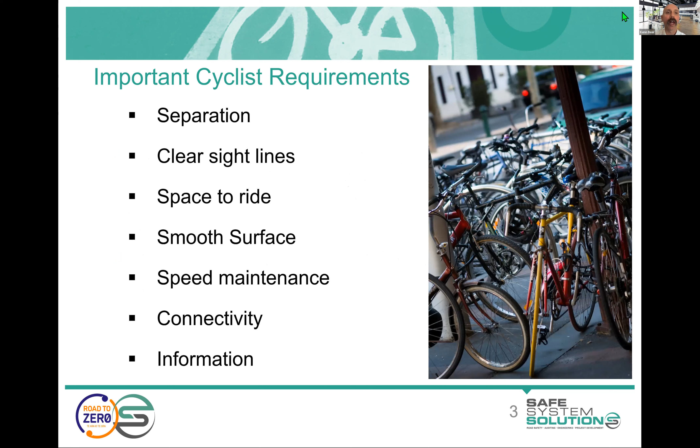It's sort of got these things to think about for safe cyclist travel. So we've got separation, clear sight lines, space to ride, a smooth surface, speed maintenance, which I'll talk a little bit more about, connectivity and information to warn, inform, guide, and the like. So just general high-level stuff there, but let's get into a little bit more detail here.

And as a road safety auditor, you kind of want to think like each of the different road users. Now that can be quite easy to do if you are a regular cyclist, or if you're a motorcyclist or a truck driver, and the like. But sometimes you've got to understand a little bit more about that road user. Most people have ridden a bike in their time, and so have some ideas there, but there's certainly a lot of variety in the riders we have, and I'll talk about that a bit shortly.

But you're asking yourself these things like, okay, I'm going to try and travel straight through this intersection. Would I feel safe doing that? Am I feeling safe on this road? Can I see things? What if they're turning? Will they be able to see me? The door's going to open in front of me. Just lots of questions like that.

I mean, what are we talking about when we say cyclists or people that ride bikes? It's the road user that I find has the biggest sort of spectrum to it, in terms of we have very young people riding, we have old people riding. We have young people and old people walking as pedestrians, certainly, but we have these extra differences for people that ride bikes, where we have the lycra-clad riders. Some people refer to them as MAMILs, the middle-aged men in lycra. They're out there doing their training rides.

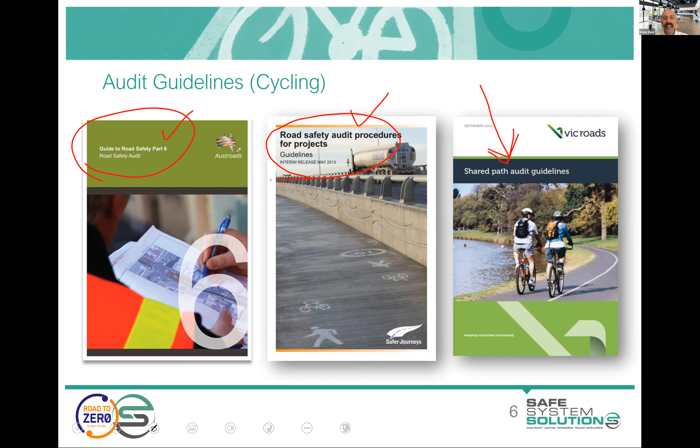There's this document which not many people know about. It is available. It's the shared path audit guidelines. It was a Victorian government document. I do like it. I think it's a little dated now, but it's generally good practice. So if you are undertaking a road safety audit on a shared path, it's a good document to have a look at. You do get good information in these documents as well, but that's a nice little document. I'll talk to you a little bit about shared path road safety audits at the end of this session.

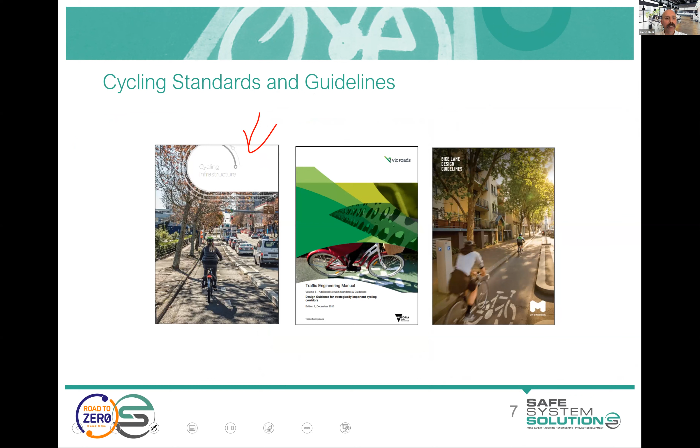Now then, you've got some New Zealand documents available on cycling infrastructure. There's lots of them out there. I've put a few here. I've put lots into your resource folder in this course, so you can delve into it. And I'm just sort of scraping the surface of stuff that's out there. The CROW manual, though, is generally considered the Bible of infrastructure design guidance. It's from the Netherlands. So if you want to get a copy of that, that's some pretty amazing stuff.

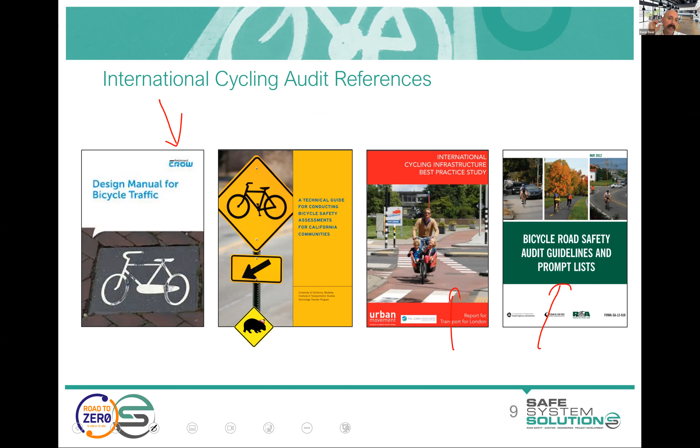And there's lots of different documents popping up here and there with different prompt list documents out of the States, and we've got more. We've got the UK document and others. So lots of stuff available to you. But let's jump into some immediate things that you might find as a road safety auditor.

The first one I want to pop up is the idea of longitudinal grates. Now, it's a very specific one, but for me, it's the one that typifies an issue which is almost exclusively for cyclists. Wheelchairs, yes, it can be an issue, although they're not usually travelling along that travel path that a cyclist would be going.

Now, I've done a number of expert witness legal cases where longitudinal grates have been in the road network or in the path of a cyclist, and they've dropped into them and come off and been seriously injured. And in those cases, I really just say, well, when we get to the component of the road safety audit course where we talk about what to look for when undertaking a road safety audit for cyclists, the first example we use is a longitudinal grate because it's so obvious when you've got an eye out for safety for cyclists.

I wouldn't say it's the biggest, it's definitely not the biggest cause of serious injury or fatality for people that ride bikes, but it is a very obvious issue. So we have many different grate types available, cyclist-friendly grates, and they're stock standard now. But you do see these sort of redundant ones in the road network.

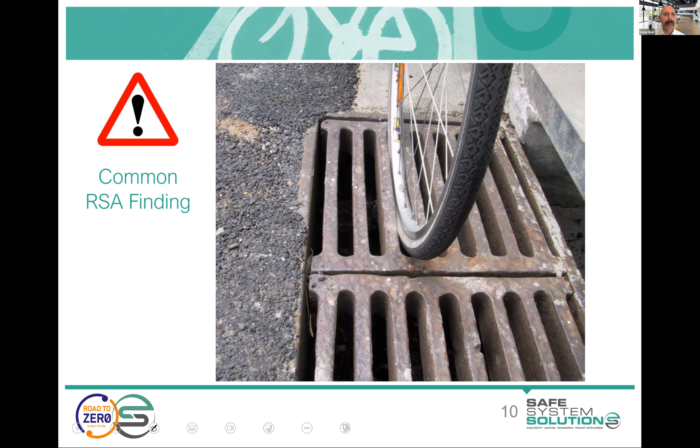And it's just unfortunate that with these incidents that happen, we want to get them done early. So cyclist-friendly grates, or ideally not having the grates and doing other drainage systems. But that's one. Another one that I suppose comes up a bit. I certainly wouldn't think, again, that this is a big source of death or serious injury for cyclists. But again, it's stuff that auditors can be picking up.

It's highly unlikely that somebody will miss that cyclist and plow straight into the back of them, where they've managed to see the green arrow but not the cyclist. I mean, that to me isn't really a possibility. More likely is we'd have some cyclists there, and then the vehicle would move to go around them, and that may be more of an issue. There could be something there. Hard to risk rate, but easy to rectify.

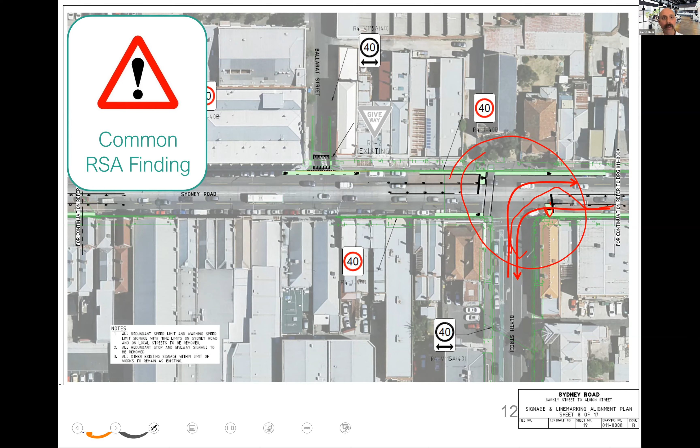Okay, this one is going to be for you to find a few issues and type them into the chat. So I'm going to pop up a picture, and I want you to act like a road safety auditor. Now, it's existing conditions, but that's okay. You're going to look for issues that you think could present hazards for a cyclist. I'll give you a second to do that.

I'll also give a prize to the person who can tell me what country this is as well. So, oh wow, I'm getting lots of stuff coming in. This is good. Okay, let's have a look. I've got to get my little notepad here to give out some prizes. Okay, so Margie gets the prize for saying it's Australia.

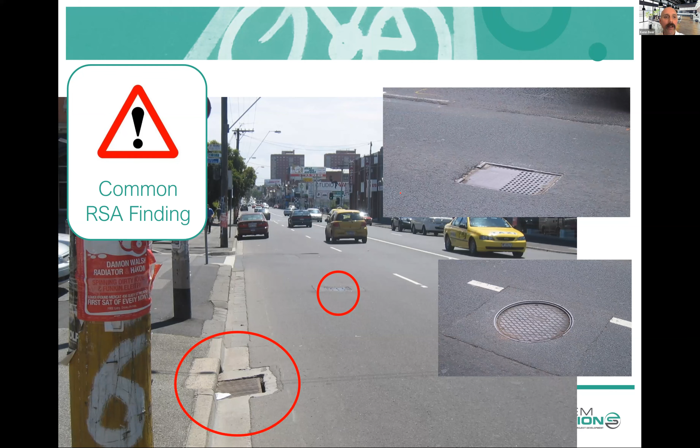Okay, I'm just going to keep moving on, but I hope that got you thinking a little bit. Of course, surface issues. Now, you may be looking at road upgrade projects and the like, where they're changing things, and you can look at the existing pits and different drainage structures and say, well, are we going to be fixing these, upgrading these, moving these? Or are we still going to have them and a cyclist going to be destabilized when they come across them? Or are they going to ride out of appropriate areas to avoid this sort of stuff? So thinking not only about that destabilizing, but also does it change travel paths for cyclists?

It's not an uncommon thing, and you may see it in design plans. On CAD these days, they just draw straight lines, but sometimes people used to look down a plan to see how things line up, and you see auditors doing that all the time to just get that feel for it. But what's going to happen there is we're going to see sideswipe crashes, and that's going to be quite common. They are very minor for passenger vehicles. But what happens when the cyclist is going along there and they're caught up in this? That's just the higher severity for that vulnerable road user.

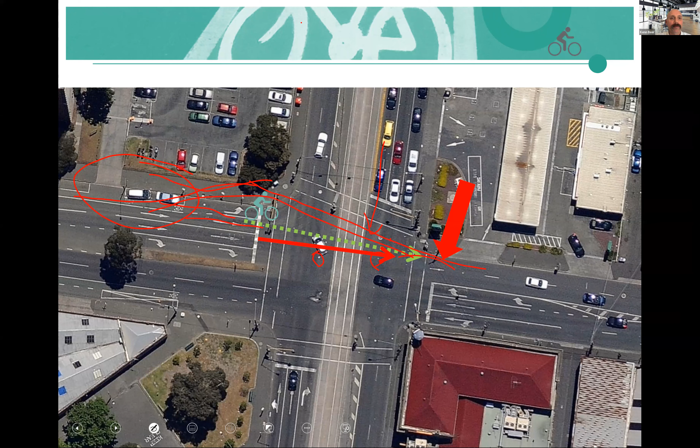Again, another little one is just as a cyclist comes up here and then gets squeezed out. So we have a stand-up lane, which essentially is, you get that extra lane at the intersection. We call it a stand-up lane. And then the vehicle coming out of here, where are they looking? They're looking back for their ability to merge. So we've just got this point where drivers are looking away from where the potential conflict point is, which is not a great scenario.

So you can do things like signal head starts, so the bikes get nice and out early, or the like, or thinking again about those facilities to protect cyclists through the intersection or exiting. It becomes very hard, but these are, again, things that can be pointed out.

So roundabouts have always been a challenge for people that ride bikes. Now, there's pretty good evidence in research around increased risk for people that ride bikes when roundabouts are there. There's actually not good evidence for the same around pedestrians. People commonly talk about roundabouts being dangerous for pedestrians, but I'm not aware of evidence to show that. I'm aware of some evidence to show that they actually appear to be safer for pedestrians. Now, I do admit that they have a serious permeability challenge, and they inhibit walking and the like. So we want to provide those facilities, but just from a pure safety perspective, we're not seeing roundabouts pop up significantly for pedestrians, but for cyclists, they do.

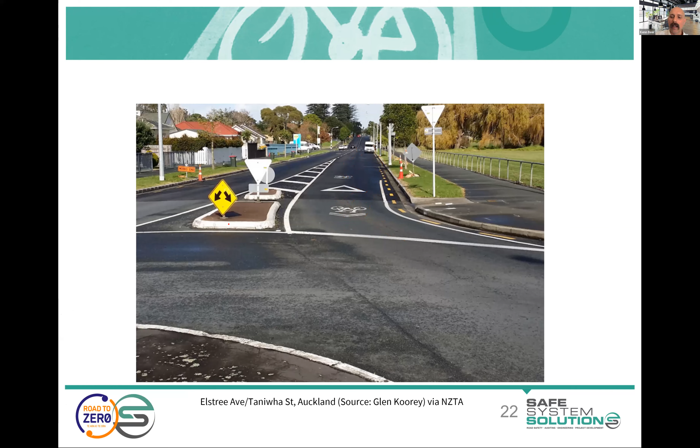2-lane roundabouts, just extremely hard to cater for cyclists. And if you talk to the Dutch, as soon as you're at a 2-lane roundabout, it's grade separated for cyclists. Your cyclists are going to go under, actually the roundabout usually goes over, because they don't like to make people that ride bikes have to go down and then up. They say, well, the ones that have motors, they can do that. The cyclists get a flat run through.

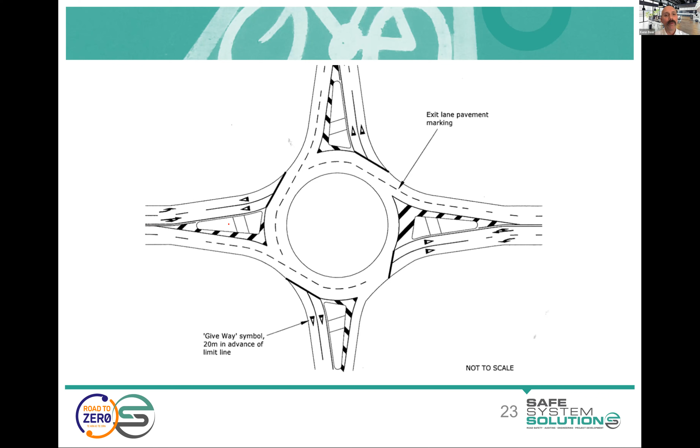But in Australia and New Zealand, we're often constrained for one reason or another. Usually it's the funding to be able to do this. And we have more and more people on bikes trying to use two-lane roundabouts, which becomes pretty challenging. There are different ways to look at it. You could look at things like pedestrian cyclist priority on legs where you have single lanes. Technically, you could look at that on multiple lanes.

And I'm just, again, doing some work trying to look at pedestrian cyclist priority on multi-lane legs, which are not signalised. And you really want to create a splitter island in between with open sight lines. And there is one example in New Zealand of that, and I can't exactly remember where it is, but if somebody can remind me, I've got, in the depths of an archive somewhere, a picture of it. There's a few others I've got from Australia, which are decent examples.

But at the least, creating good points for cyclists to pause, to wait for their gap to cross. And as I say, the Netherlands would just have you go under that. That would all be an underpass.

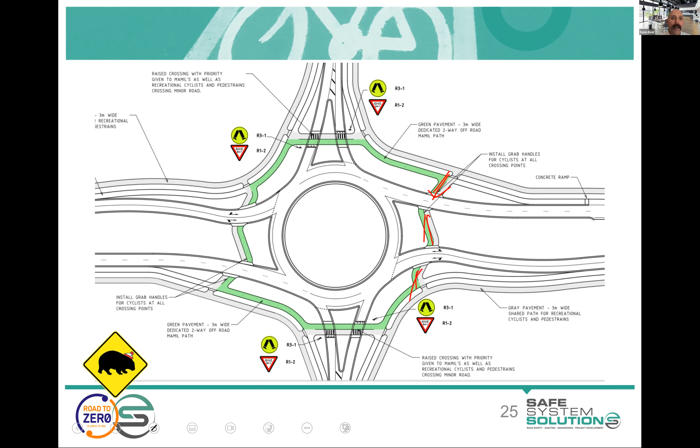But the best practice in terms of a single lane roundabout for pedestrians and cyclists are these what we call protected roundabouts, and I think we will see an explosion of these across Australia and New Zealand in the next decade because they have been built now, they have been evaluated, they're performing really well. There's understanding now about the function of our road network to be more than just moving cars, and that we are utilising these as active transport corridors, and we're okay to potentially slow vehicles in some specific areas down a bit and provide priority to those road users.

And they work really well. A cyclist wanting to turn right comes in here, goes around, and off they go. They've got their own way to do that, or they can continue through. So there's this one built, Moray Street. Happy to provide people with video footage of riding through it and walking around it, some 360-degree footage as well, if you're interested, if you're planning to construct one, or if you're auditing one, to have a look at features and what design tweaks work well and don't work well.

Really performing well. A courageous local government authority that popped this in as the first one in sort of Australia and New Zealand. And the reason is that it was known that it's going to slow vehicles down through there, okay? But they were pretty okay with that and had some great standard letters to send back to people suggesting that they walk or ride their bike where they possibly can, which I thought was very courageous and good, and it aligns with all of their strategic commitments.

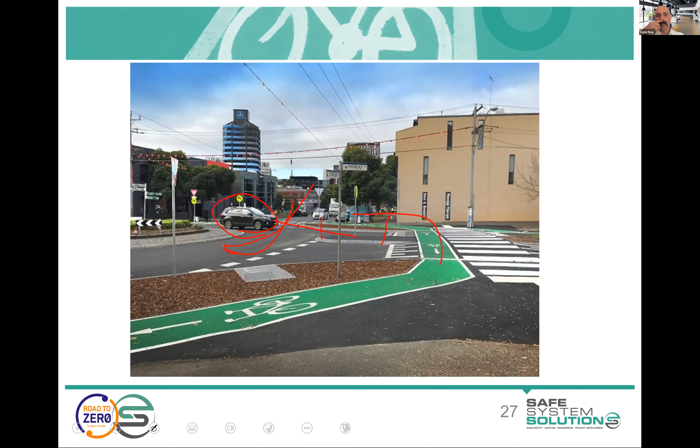But what you can do is sort of conflict analysis: video it, watch, understand, and it performs pretty well. Somewhere around 75% of cyclists utilising the facility, and the others are still just using the roundabout as they do, and yeah, working quite well. And people are still playing around with and trying to think about how to do this for two-lane roundabouts and what can be done.

I'll pop this one up for a couple of reasons, but as a road safety auditor, you've got to think, okay, are we providing facilities for cyclists? But are they going to impact on other road users? Are we going to create risk for others? Are we going to create risk for the cyclists by trying to cater for them? That's what we need to think about, providing that independent lens.

So this is an interesting one where the design idea was to create this little pocket there. One of our designers refers to it as the MAMIL pouch, because the cyclists using this route are predominantly middle-aged men in lycra, and the idea was that anybody who's turning right can ride up and then prop here and wait for their gap and then continue on through there.

But as an auditor, you just sort of look at that and you again put that common sense lens on it. And first of all, say, well, is the pack of riders going to use that? No, they're not. There's not enough storage for all of them. This is sort of the one rider will use it.

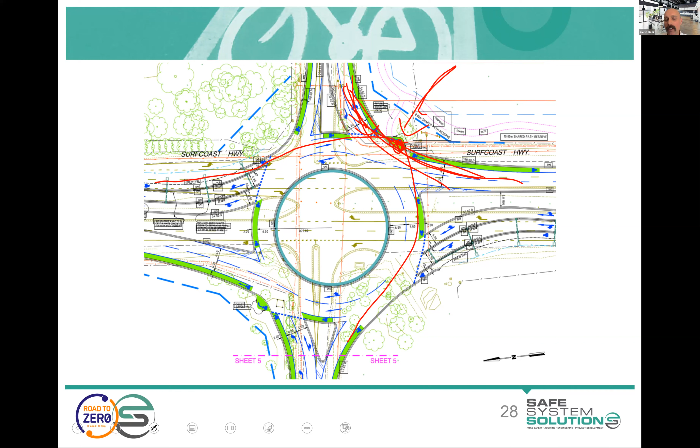And the second one, you start to think about vehicles coming out of here, larger vehicles, swept path of vehicles. Are we going to have vulnerable road users storing there and larger vehicles coming around here and their trailers and things sweeping over these areas, and some other challenges there. So, lots of thinking to be done as a road safety auditor and lots of input that you can have.

So cycling facility, well, it's sort of a shoulder cycling facility, and this is the design. So this is good because this is the kind of stuff you'd be looking at and you'd be saying, okay, so we've got that, and then it goes up and there's a dedicated sort of bike facility along here for riders, and that's nice. Get them out of the circulating carriageway, get them a bit of space, and they can go through. It's going to be a challenge to turn right, but we won't deal with that in this one.

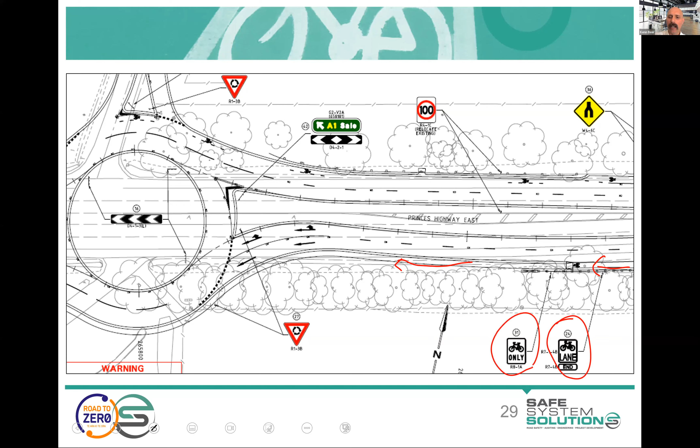And this is good. And what have we got here? Some interesting signage. Bike lane ends, and then bike only. Okay, this is interesting. You get there on the ground once they've built it and have a look at it. Think, okay, as a cyclist, as somebody riding up to this, what are you going to think? And to me, I look at it and I go, well, I kind of think that my facility ends here. And it's time to get in and battle it out with the cars and the trucks.

And a little bike only symbol up there. And I think we might miss that potentially, or it's really not that obvious. And it's interesting because this was purpose built for the bikes, yet to me, it almost will do the opposite. It's going to create bikes pushing into that area. So some simple little alterations to this, thinking about it at design stage, or even potentially at post-opening, as this one was, would be to use some green, just connecting those two.

That would very quickly highlight that is where cyclists should go. That's not the traditional use of green paint, okay? Green paint was and is generally used for a conflict point between a passenger vehicle and a bike, okay? So it is to warn the driver that a cyclist could come to this bit of the road.

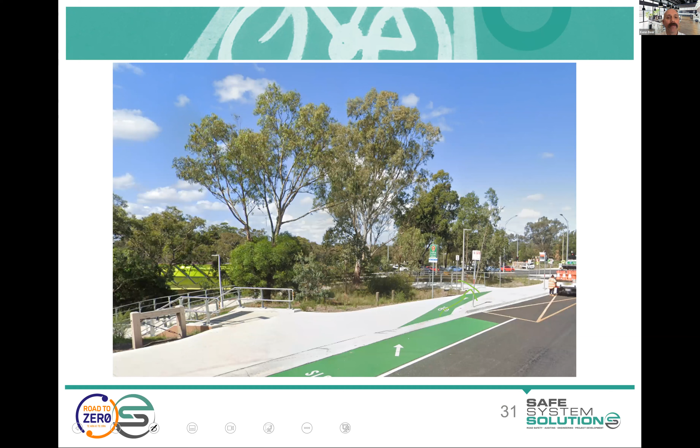Pop your questions or comments in. I'm sort of running through a whole lot of stuff. I certainly do love bike infrastructure, and I'm an avid rider of bikes myself, so get into this.

Dooring, a term that's really unfortunately risen its head in the last 10-15 years, is the act of a door opening in front of a cyclist, and the cyclist either striking the door or avoiding the door and going into fast traffic. Most of the death we see associated with dooring is secondary impacts, where the rider hits the door, comes off, and is then struck by vehicles in the lane next to them.

We do have a lot of serious injuries, not a good thing, very bad thing, of cyclists hitting the doors, so that actual impact, but the highest severity incidents involve the other vehicles. Really hard thing for us to treat a lot of the time. However, we are getting better. I'll jump past that one.

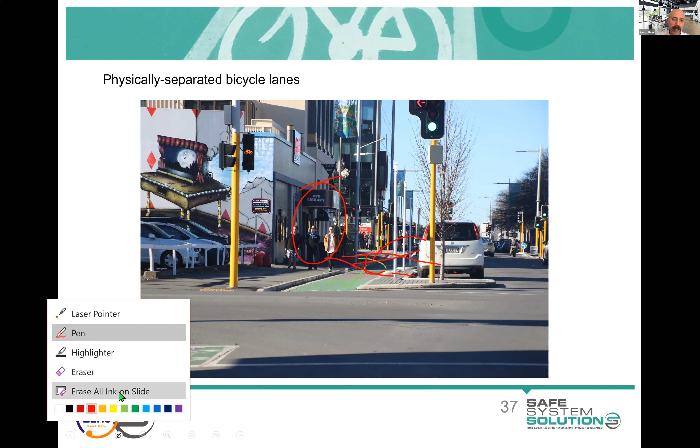So I'm just reading a comment here. Do we get peds crossing? Yeah, pedestrians certainly do cross in these areas to their cars and can use the crossings as well. Occasionally, and I've got some photos of this, we have them used as parking facilities and taxi ranks. If you provide particularly wide ones, you're going to have vehicles park or store in there. So that's a challenge to work through.

Again, these things from a road safety audit perspective, you might be putting them in as notes, which you can do in an audit. You say, well, I can't make a clear line to a crash which is going to cause injury, serious injury or death to anybody, but it's going to be a not great situation from a user perspective or the like. You can put them in as notes.

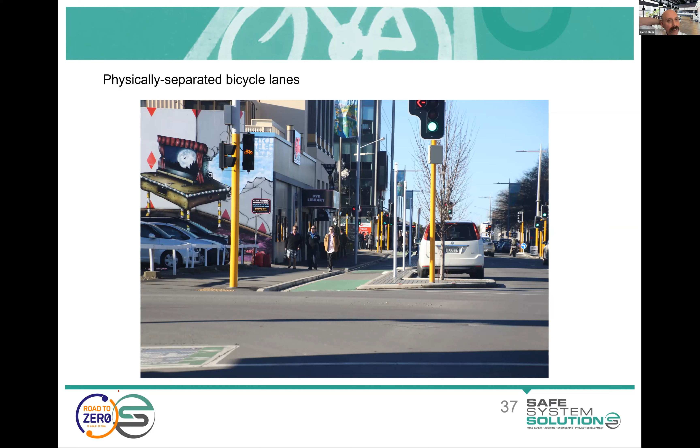And I talked a little bit there about shared path crossings and giving priority to that shared path. What you're essentially doing is creating an intersection where that path acts like a road and it is the priority road. So you will put these give ways to the vehicles. Now, you really want to be raising these because there are just wonderful benefits all around for that, slowing the vehicles and the like.

We've got some different signage these days, so check with your local signage exactly how you would sign these, but these are something that is being looked at, and you can see the sort of way that they come about. Now, sight lines, important one. Think about providing drivers enough sight distance to be able to stop because they don't have priority. So essentially safe intersection sight distance at these locations. And that's what the rider will see, and they get that clear priority.

Now, as a road safety auditor, this is a classic example. I do have a video of this, but I don't trust my ability to stream that through. As you're riding this wonderful shared path, you go through this priority, you go through the next one that has priority, and then the third one you hit doesn't have priority, but it kind of draws you along. It's an old rail trail, and it's still got the rail lines embedded in the pavement, so it even gives that effect.

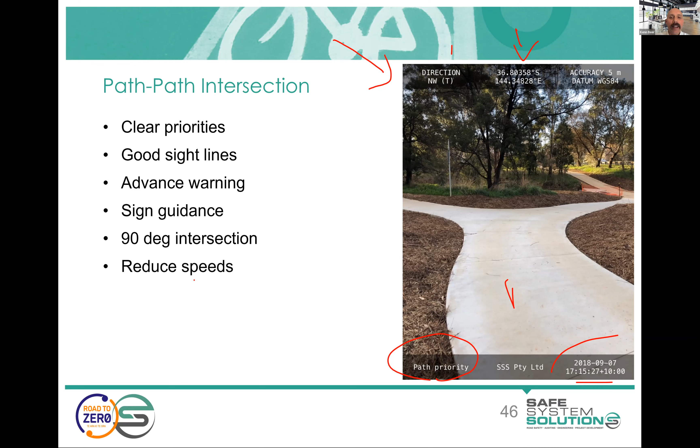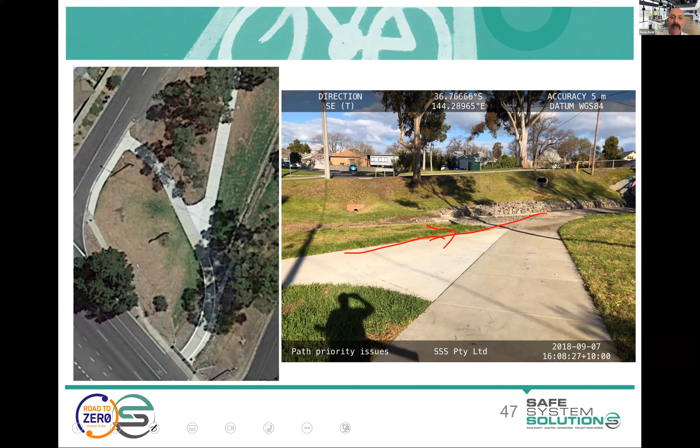Okay, let's jump through a few more. Yeah, more path priority sort of challenges, it's like a Y intersection on the road network, isn't it? Who's got priority here? Not very clear. You could have incidents. So actually that one technically has priority, but with the path it changes. It's a little bit interesting.

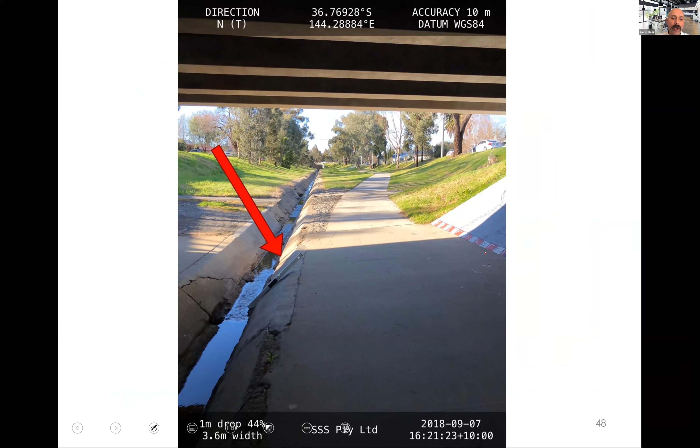Drop-offs, of course, an issue, and there's some good guidance in the different documents about acceptable drop-offs. But again, go common sense at it. Would you be worried about that? If somebody was walking down here with their dog and the dog jumps out at the bike rider, or a kid or a pram, shared paths can be quite chaotic places. So it might be obvious, but you may need to avoid these sorts of drop-offs, or even hazards close-ish to the path we don't like.

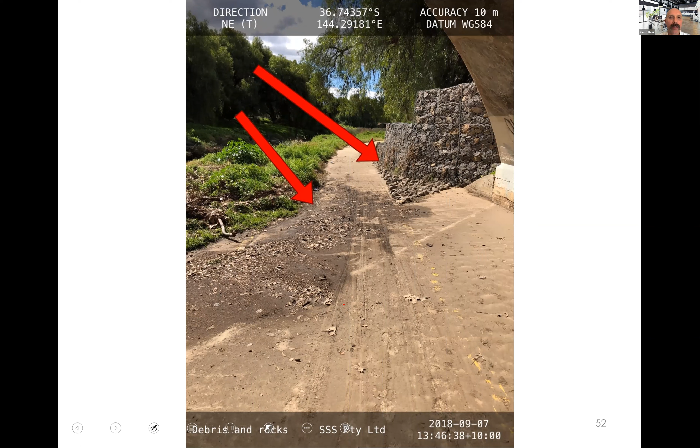Different obstructions within the path, and at night these things can really disappear, so you want to significantly highlight those. Debris on the path and the like, I think those are fairly obvious.

Fencing, thinking about riders catching the pedal or a handlebar, and so we want to use specifically designed fencing. And there are really great fencing guidelines and specific fences to get approved. So again, look at your local fencing guidelines. You'll see pretty obviously when you're riding along fences that you go, well, I don't want to go anywhere near that. You don't want to go near these, but it's better.

And often we have shared paths close to roads, and there's good road safety thinking in terms of separating using barrier systems. Unfortunately, the back of a lot of our W-beam systems present significant snagging hazards for path users, so think about how to manage that. Again, we've seen some road controlling authorities in Australia be successfully sued for riders and joggers hitting the back of W-beam systems and seriously injuring themselves. So something to think about.

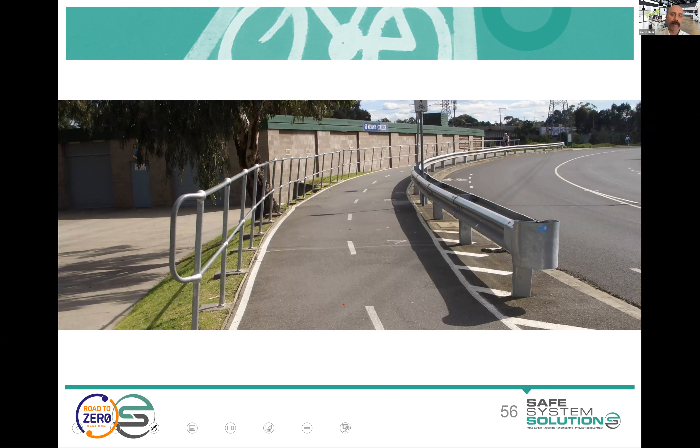Options include back-to-back systems. There's now wonderful back-to-back W-beam, flexible W-beam systems available, or your old standard G4 or Type B systems like this one can be done. So it's available, or creating more space. There's some post caps available, plastic post caps and things.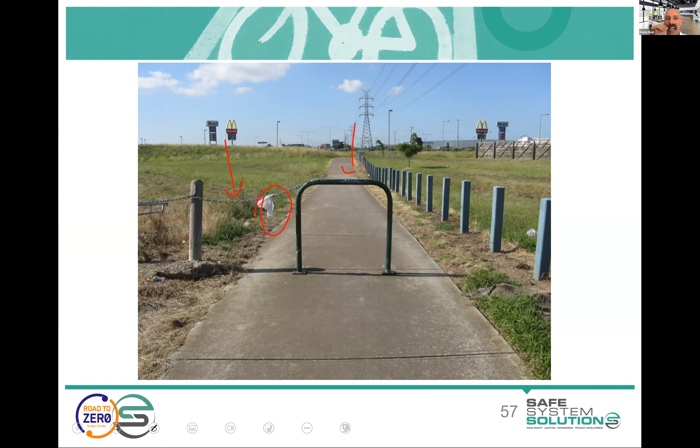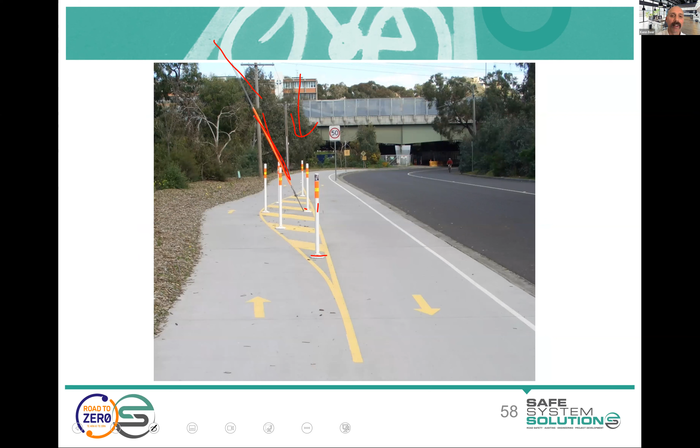I think this is a good setup. I think they've done well here. The cable stay, which is holding a power pole, ideally we don't have that in the middle of the path. However, they've clearly delineated it. They've got retro-reflective. They've got flexible posts, the ones that will collapse. They've line marked that, and put highlighting and a little bit of protection on the actual hazard. All things considered, I think they've done a decent job here with the situation they had.

So I sort of ran through that at the end. We did a little fact sheet on these thematic audits, and these actually now have made it into the 2022 version of the Austroads guide. But we've had these for a while.

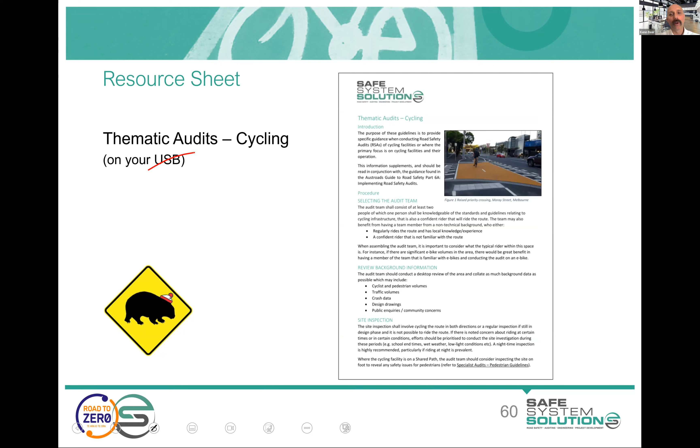I put the originals into your learning management system, not on your USB. They're in the learning management system, so you can have a look at this. It just gives a little bit of the guidance that I'm talking about. So if you are doing one, you can have a flick through the shared path audit guidelines, and you're good to go. We won't do that quiz because I'm going to catch up on a bit of time.

We're going to talk about... oh, that's not where I want to be. That's where I want to be.

We're going to talk about motorcyclists now. And I will move quickly through this. I apologize, but I'm going to give you some info. There's a bit of overlap between motorcyclists and cyclists in some of the thinking, but certainly riders have unique needs and are often a forgotten road user in our thinking.

Now, you've got some wonderful New Zealand people for motorcycle safety. You've got many people who know that. Robin's in this course, Robin Gardner, wonderful motorcycle safety thinker, and many others. So you're in a good position for assistance, but as a road safety auditor, you need to think about this road user as well. And so I'm going to go through requirements of motorcyclists for safe travel, different technical information available, common issues, and some treatment terminology.

Motorcyclists are seriously overrepresented per kilometre travelled compared to cars. We're talking 20 to 30 times more likely to be killed or seriously injured. And there's a heap of factors as to why that is. But their vulnerability and their size are certainly big ones.

So immediately we have some documentation available that will help you to think about the needs of motorcyclists associated with the infrastructure, the design, the operation of the road. And Making Roads Motorcycle Friendly here, you have your New Zealand version, and that's available. You can Google it, Making Roads Motorcycle Friendly New Zealand. You can have a look at the other jurisdictions that have them as well. And it's a good way to gauge what are the particular things for motorcyclists that we need.

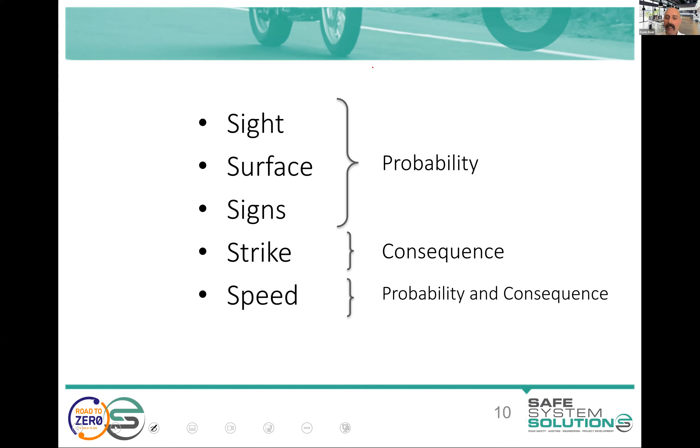And this kind of curve that tightens up has a technical name. Actually, I'll give a prize if anybody can tell me what the technical name for that is. Ooh, tricky one. Some people call it a double radius curve, but it has a particular name which Jesse has got, compounding curve. So it's a compound curve, and not a great thing for cars. You're going along and then it tightens up, and maybe there's a little bit of traction loss, but generally cars are okay. Riders don't have that correction luxury, and they end up on the wrong side of the road, or if it's the other way around, they end up in the roadside.

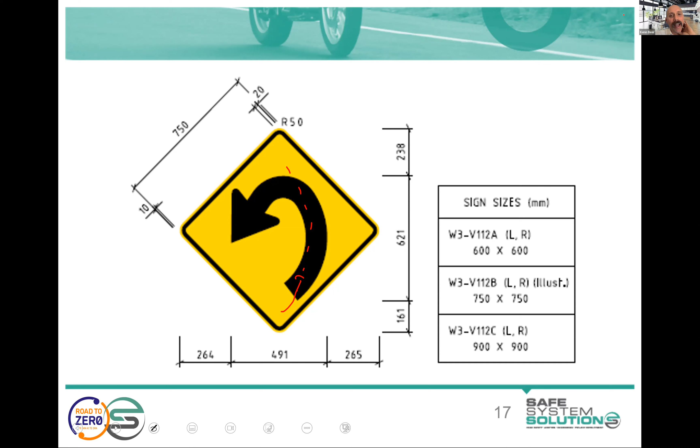So particularly dangerous. So these signs are available, and there's been some evaluation of them, not the best evaluation, but they are proving really quite good, at least from riders' commentary around them, in warning of these compound curves. Ideally, we wouldn't have these compound curves, but they're out there, and it costs you $1 million to remove one, so you're going to end up having to sign them anyway.

Is it in the TCD manual in New Zealand? I'll wait and see if anybody else can answer that in the chat. I don't know. I know there was interest in using them and trialing them, and I think they do a wonderful job.

Here's an interesting compound curve example. Four motorcycle run-off-road crashes to the outside of the curve at this location, and it's got a 252 radius into a 117 radius, an unsealed road entering here, the gravel wash there. You can see why it's a particularly dangerous location for riders.

So as an auditor, and I'll talk to you about motorcycle audits, you essentially would send a rider through the route ahead of a trailing vehicle of auditors, and the rider would be mic'd up and talking about what they're feeling and seeing, and they will tell you. You don't need to do ball bank indicator tests or GPS tracks through a touring route, because that rider will go, wow, that tightened up on me, and you know that's a compound curve, and you'll probably feel it yourself in the vehicle.

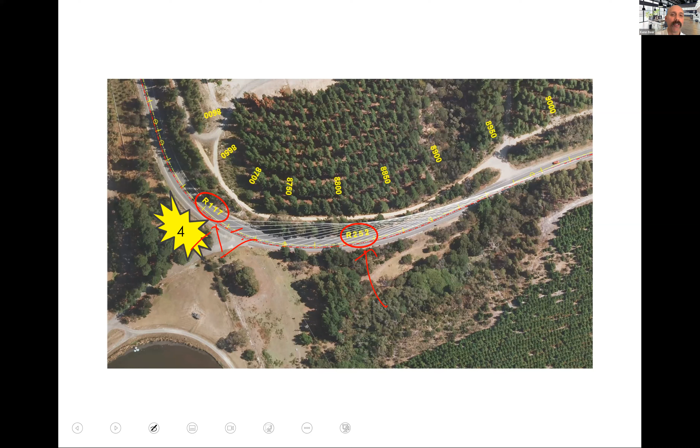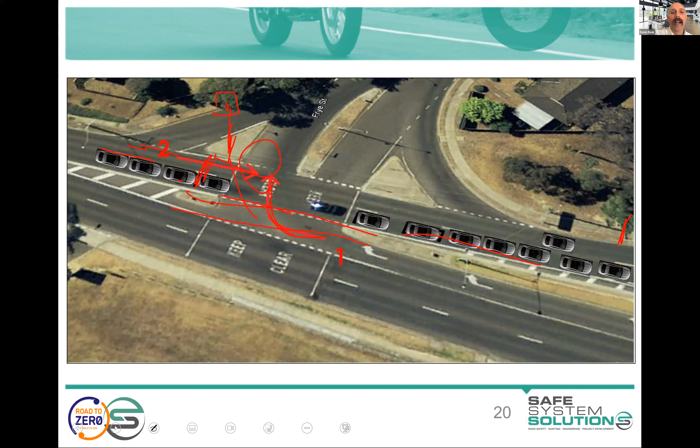What can we do about it? Well, as an auditor, you could recommend all sorts of things, from linking signals. This is obviously queuing back from a set of signals. You could put signals here, so when the queues get to a certain point, you block the motorcyclists this way. You could pull the keep clear hold line back a little bit to open up sight lines. You could block that off if there's no need for it, and different things to do.

And let's talk about the surfaces. So motorcyclists lean, and this creates a scenario where the rider is heavily reliant on the surface. Their center of gravity is out there, and any surface defect will slip them out, and we're in trouble. So motorcyclists, we talk about as the canary in the coal mine when it comes to surface deficiencies, the first to be killed.

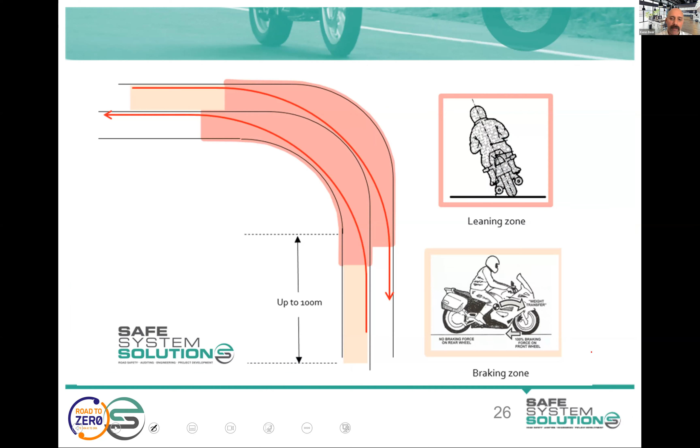It's more of an existing conditions look you tend to do, but if you're looking at areas and wondering whether these surface deficiencies are going to be fixed when they grade the road, you look at the design, you can think about motorcyclists and cyclists as well there, especially where they're leaning, where they're braking into different curves. So we want good skid resistance and consistent surfaces.

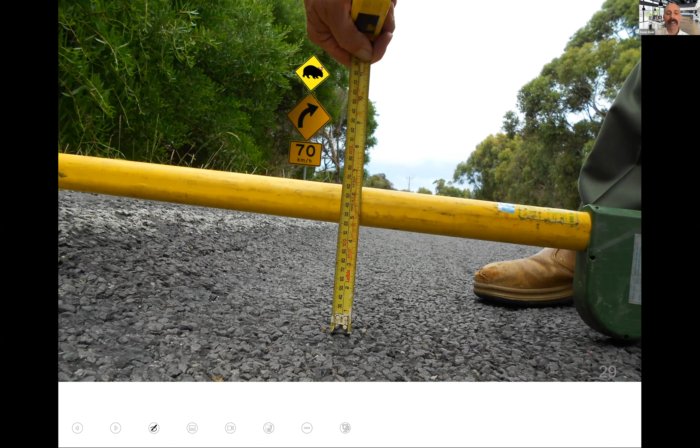But unfortunately, we see a whole lot of challenges out there. We see different depressions in the road, which can destabilize a rider, make them lose traction or lose their line. Potholes, pavement failures, roads in all sorts of disarray. And in terms of roadworks, gravel wash, mud, debris, detritus, all that stuff on the road surface makes it slippery, and we've got to think about

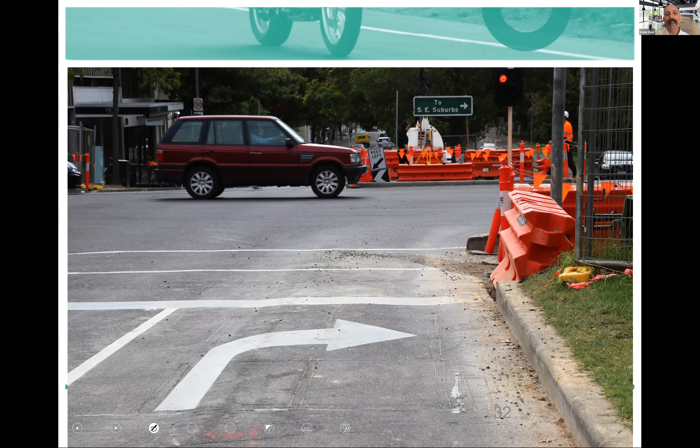riders in those situations. We think about our patching and where we're doing patching, and whether we can do full width patching across the lanes. That would be good. It would cost a little bit more, but you can see that the rider's line is directly on the connection of that patch, which may open up and break up over time.

So a question there from Sebastian, which is a good one, around the inherent vulnerability of motorcyclists and whether to phase them out of the transport system. Well, gee, I could have a long chat about this. I'll make two comments. Well, first of all, if motorcyclists didn't exist and they turned up and wanted to use the road network, there is no possible way they would be allowed. Like, the risk is just way too high. But we're not in that situation. We're in a situation that they are

a road user, and they are a licensed and registered road user, and thus, as road safety auditors and as road designers, we have a duty of care to do the best we can. Now, we're going to struggle to do everything to make it completely safe. However, that's the world we live in. Now, there's bigger political things. Do you try to phase out motorcyclists? Well, it's political suicide to jump on that bandwagon at the moment.

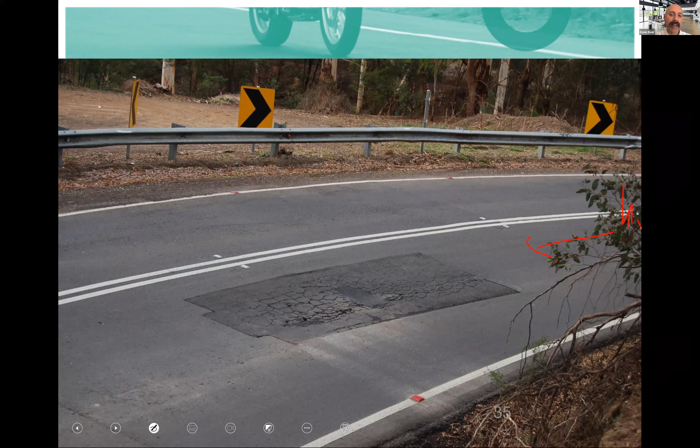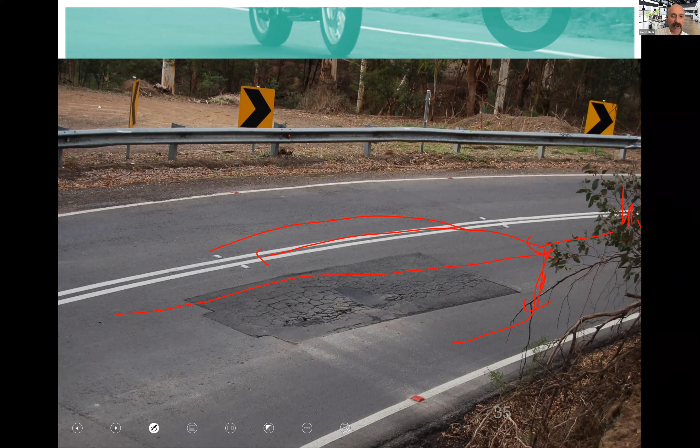I'll let that happen. Still talking about surface issues, and just interestingly, on those curves where a rider is fairly stuck to a line, if they encounter something like this, coming around a curve and there's a sight distance impediment, there really is no option to go inside this. The only option they have is to go outside it, pull the bike upright and try and navigate it through. They're really going to go on to the wrong side of the road. So that advanced warning of any of these issues is so important. Obviously, trying to fix it, not have them there, is the ultimate.

Now, as a road safety auditor, you're often auditing to the design, aren't you? Well, you can look at where surface pit lids are going to be put, and if they are in the circulating carriageway of a roundabout, or in the middle of travel lanes and things like that, you can point those out at that early design stage and see if they could be moved, which is a good time to do it.

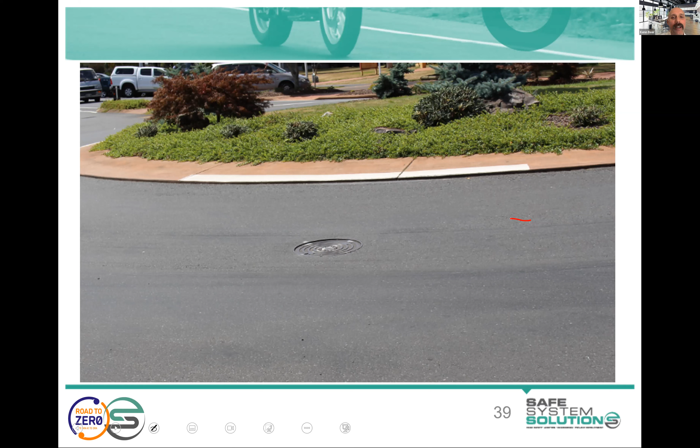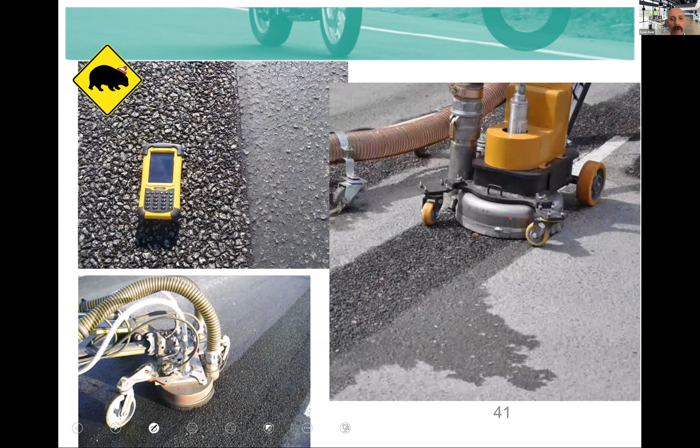Surface conditions: we can improve skid resistance in many different ways, water blasting, different surface treatments and the like. So have a think about that. Think about the curbing that's used. There are obviously drainage requirements around different curbing, but barrier curbs are easily enough to destabilize a motorcyclist. The more mountable the curbing, the better.

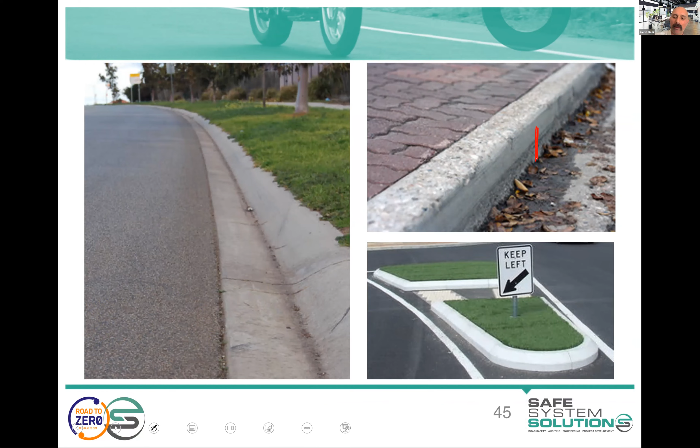Guaranteed, if you get into road safety auditing and do a fair bit of it, you're going to see designs or proposals to paint lots of stuff on the road surface. I want you to think about that potentially being a slip hazard. If it's a thermoplastic line marking and it gets a bit worn and a bit wet, it's very slippery. We don't want to see big swathes of paint on the road surface, because it can be that slip hazard for the rider.

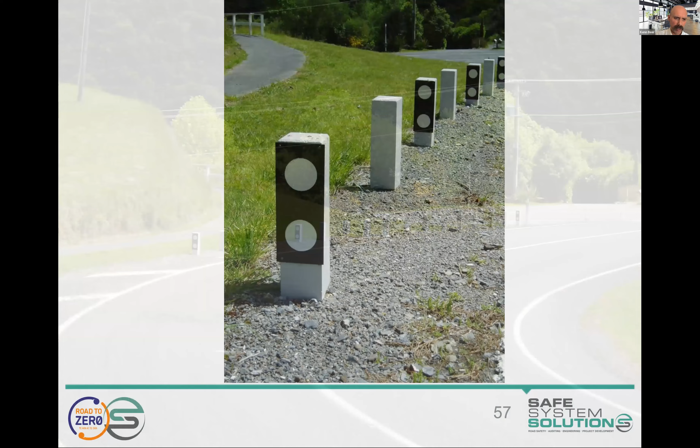It's a popular area. We've got a bit of a surface issue. We've got a curve. We've got these concrete block things. They're not going to be good for cars, but they're quite a hazard for motorcyclists there. So we have to think about how we treat those.

We do have flexible signage available, because a galvanized steel post that we would usually call frangible, breakaway on impact, is certainly strong enough to kill a motorcyclist. They hardly budge. They just kill the rider when a rider strikes them. We do unfortunately see quite a bit of trauma associated with riders striking normal signposts and being killed and seriously injured. So there's work happening in that space. It's very hard because you've got to cater for wind loads and all sorts of things. There are low mount products which are quite good, but for higher signs it can be challenging.

One way to do that is using underrun protection, because half of the motorcyclists hitting barrier systems are sliding on the ground and hit the base of the barrier system. The other half hit the barrier system while still on their bike and go over the top.

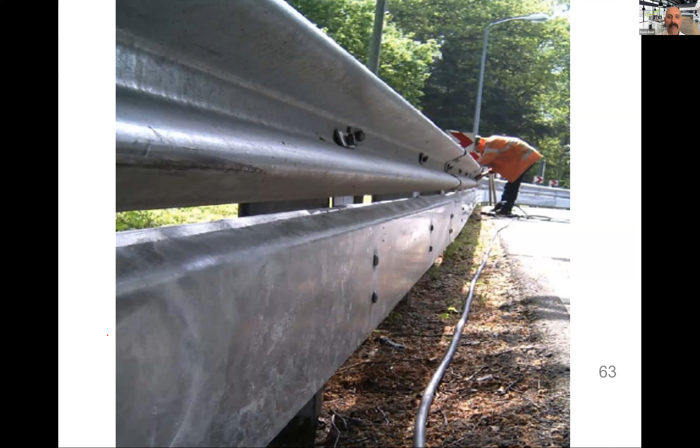So this underrun protection, and there's a heap of different products that now do it. So the generic term is underrun protection. People might call it rub rail. I mean, rub rail is a particular product, albeit a public domain product. So there's different ones. There's biker shield and motorcycle protection rail and different brand names that you can use, but they sort of create that continuity of the barrier system.

So if a rider's sliding along here at 60 kilometers an hour on the ground, hitting one of those posts, definitely seriously injured, if not killed. And if we put that there, lower injury, likely not killed, likely to hit it and slide along it. Still injured, I would imagine, but a better scenario.

And these have been crash tested under the European crash test. The Spanish invented it, but I think I've got a video of that crash test coming up. But it can be retrofitted to existing guard fence, and oh yeah, here. So this is the European crash test. You use a motorcycle crash test dummy, which is just a normal crash test dummy. You do minor modifications to it, and then you slide it on a sled and let it run at 60 kilometers an hour directly at the post, and then you do one directly in between the posts.

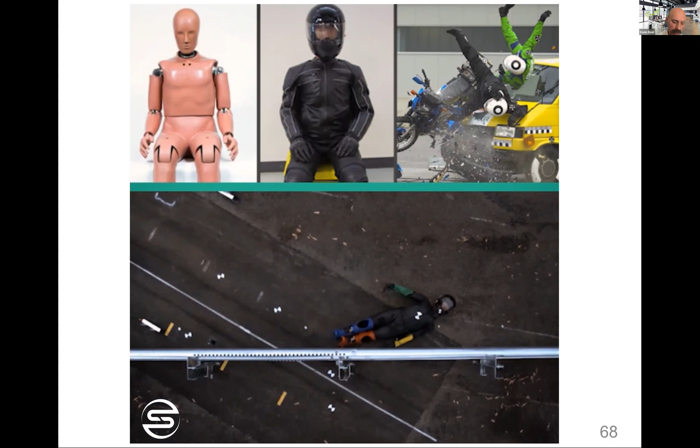And so this one has proven that these bring the crash severity at that 60 kilometer per hour, 30-degree angle within tolerable limits, under sort of level 3 serious injury. So it's as friendly as you're going to get at a 60 kilometer per hour crash into a solid object as a motorcyclist. So we can get good benefit from that.

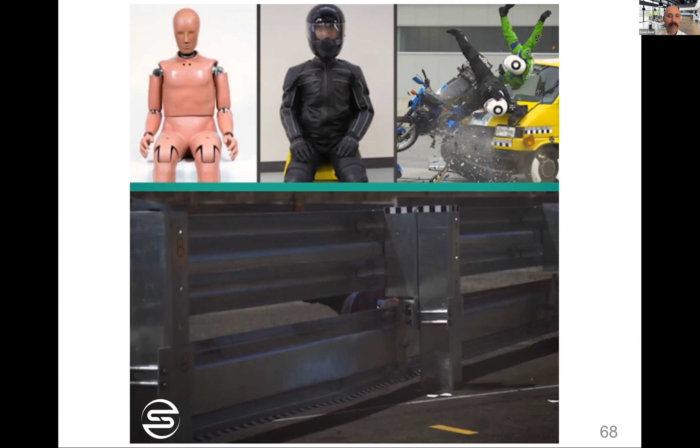Little tip as auditors: the end of a barrier system is a pretty specific engineered device. We don't know what would happen and how that would operate if underrun protection was connected to it. Nobody's tested that, and so if you were to see connections to that under here, that may compromise the functioning of that end terminal, which, if struck, does some very specific things.

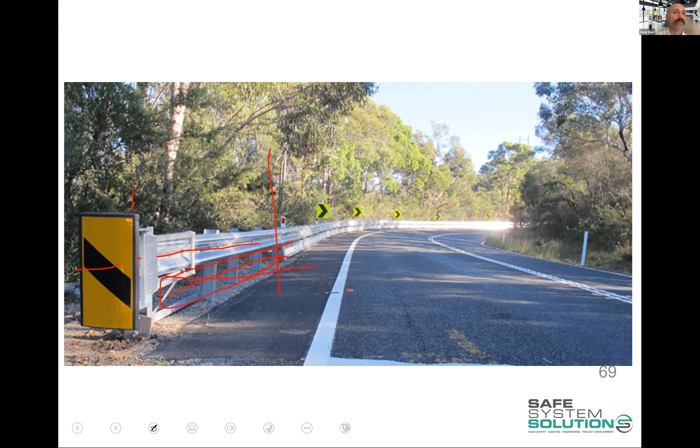So we have seen that in the past, connections all the way up of the underrun protection, which actually will create risks for other road users. So keep an eye out for that sort of stuff.

Wire rope safety barriers present interesting challenges for riders, but probably not the reasons why you may have heard. Some riders still talk about wire rope systems as the cheese cutter, imagining getting sliced by the wires and the like. Lots of research went into all of this and really showed that the wire rope systems don't present that cutting danger with the wires. Riders that hit these systems, if they do, go over the top of the barrier, just as they do with any other system. The posts are the danger, sliding, hitting the posts.

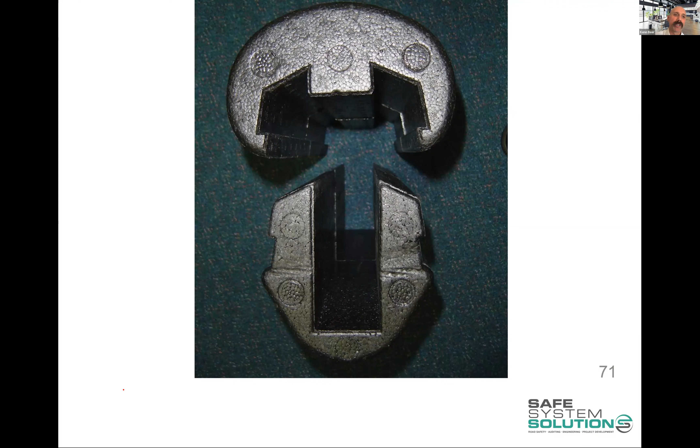But the one thing I suppose I agree with is that we don't have a great way to retrofit a wire rope system for motorcycle safety. There are these different post protectors, stack cushion, and a few others that could go around them. They're not good.

I mean, they've been used, I would say, as just a PR device, because people are jumping up and down about the barrier systems, and so these were used, but they've never been tested. Just basic logic says they're not going to operate well. You're trying to absorb energy rather than redirect energy along a system. They're football goalpost padding at best.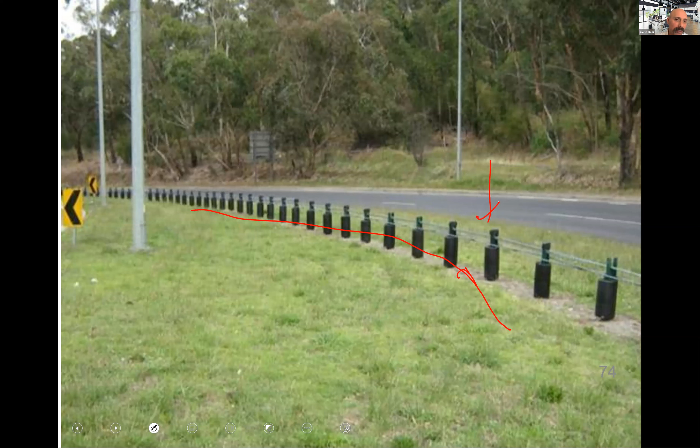So the reality now is that they used to be things you had to use when we didn't have anything better, but flexible W-beam systems with underarm protection are your go-to every time. If you were ever considering putting these on there, you've got the wrong barrier system. Anyway, I'll talk more about that to anybody who wants to go into long detail.

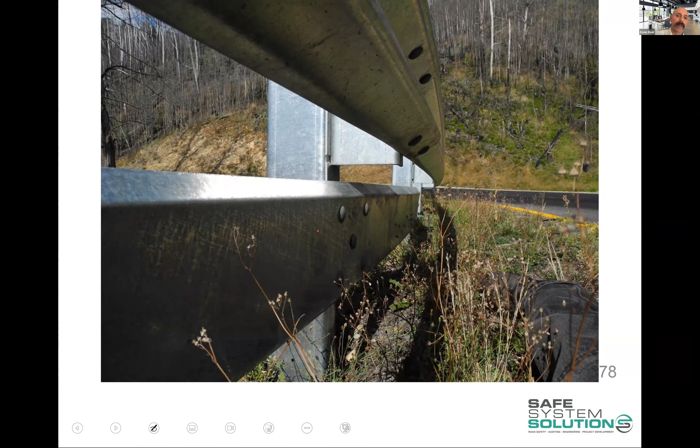Connect underarm protection to its bracket, not directly to the post. We saw a heap of these go out directly to the post, but you lose all of your cushioning value there, and you've got areas where a rider's leg or an arm can fit through these holes. I'll just jump through a few of these to get to where I need to go.

Speed, super important, and there are many ways we can influence rider speed and car speed around riders as well. So simply good delineation, but do remember that these can present a strike hazard for riders. We're working on some stuff to try and make these friendlier, but it's quite a difficult engineering challenge. But yeah, so good delineation, speed advice, speed warning.

I don't get worried about the idea that riders might not follow these advisory speeds. I say that they are out there to indicate the radius of the curve they're approaching. And so if they want to double them all, okay, we've provided consistent, clear advice, and consistency is key, no surprises. So if it's a 35 for this one, down the road where it's a 35, they know what they're going into, and that's us doing our role as road designers or auditors.

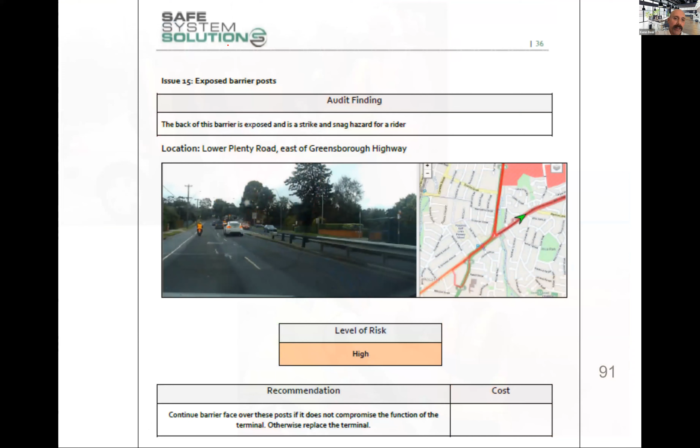And I mentioned motorcycle audits. So this is where you take that rider and the rider communicates what they're feeling, what they're seeing. Wonderful when they're a road safety auditor too, and they can really get into that. And you can have a following team in a vehicle, and you can have your rider out there talking about their issues and what they're seeing and feeling. And we've got a fact sheet on that in the learning management system as well.

I'm not going to do the case studies because I'm going to give you an audit to do. And sorry, I apologize, I ran through that a little bit quickly, but it's really important for us to get to the introduction of your task. Let's go.

Okay, so hopefully you're seeing the learning management system now. I think I'm in teacher mode, not student mode, but that's all right. You know this system quite well now. We're moving into the real pointy end of this course. We've just finished the content of module 4, and we've got lots of stuff in there, the slides. I've got some case study videos pre-recorded because I knew I'd run out of time, so there's more there if you want to watch it, and I talk through different case studies.

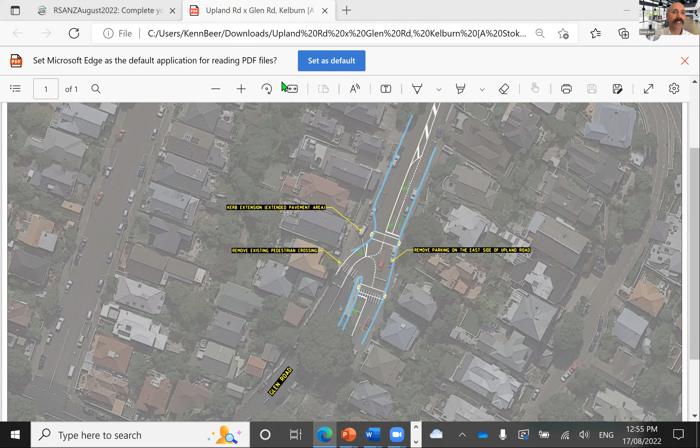So you will find issues. You won't have all the information you would like, but you'll have some information. And remember, you're auditing the design, not what's there at the moment.

If what's there at the moment is going to stay with the design and be an issue, you'd still report that. But then you get the audit template, and I had opened that one before, but let's open it again. So then you download the Word document template, and anything that's yellow, you fill in. Okay, anything that's highlighted yellow, bright or light yellow.

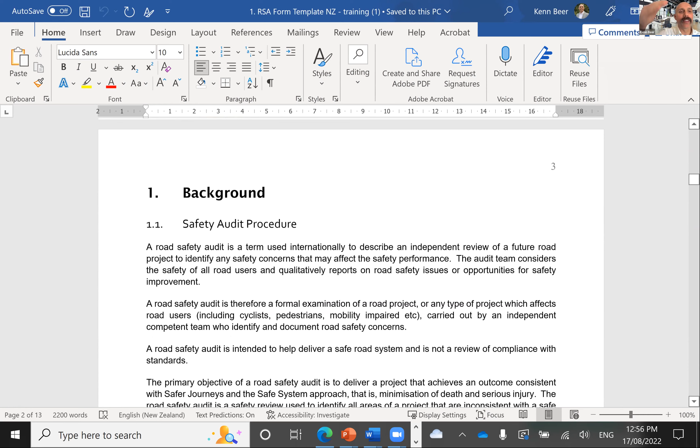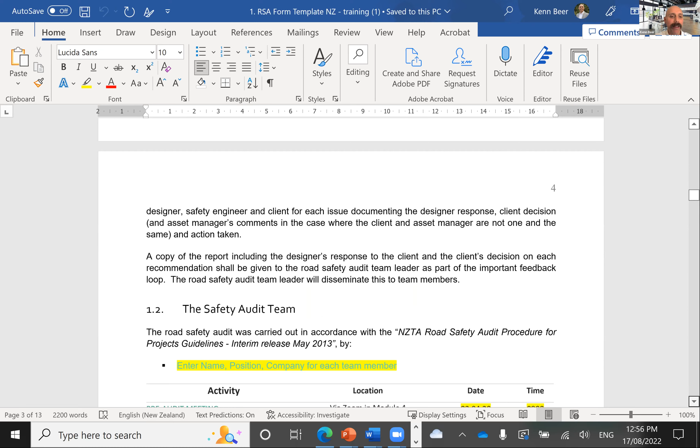And so let's have a look here. You've got some stuff that's not highlighted, so you don't need to do anything because these are standard words in the New Zealand template. You just leave them there. Have a read of them if you want. It just talks about the audit process, what it is. Now you're going to put your name in there, okay?

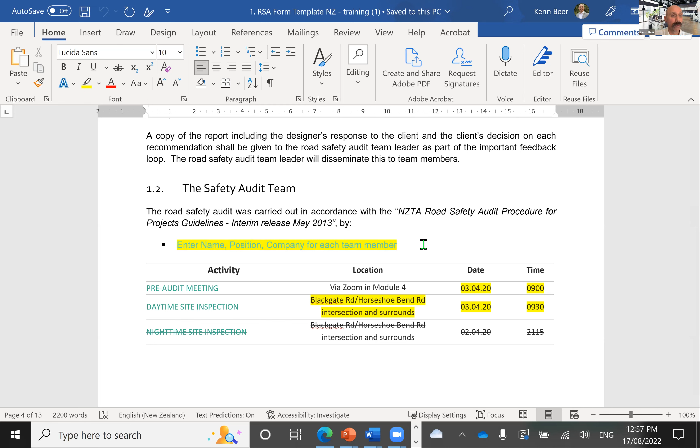And if you see another name for your site and you go, I know them, I want to work with them, check with them, you can do an audit together. We're okay with that, okay? In fact, we love auditing in teams, but we really want you to be working together on that. But if you do that, you have to put both team members' names in here, okay? I don't want to see two identical audit reports by one person. I want to see it as a team report. You both submit it through the learning management system.

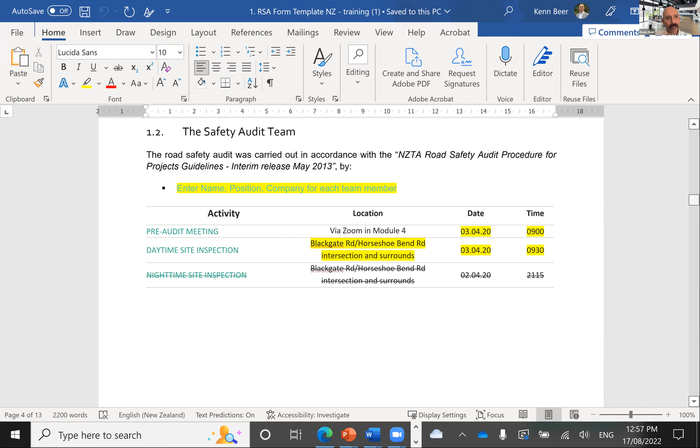So then we want you to fill out your site inspection, had your pre-audit meeting. This is it now. It's not really a pre-audit meeting because you'd be asking lots of questions about the design and why you're doing this and what's happening here and how you're doing this and the like. But for our mock exercise, this is it. You got your risk matrix there. Now, scope of the audit.

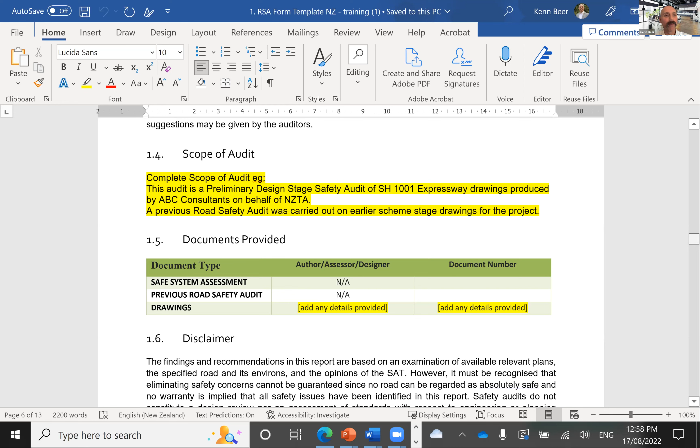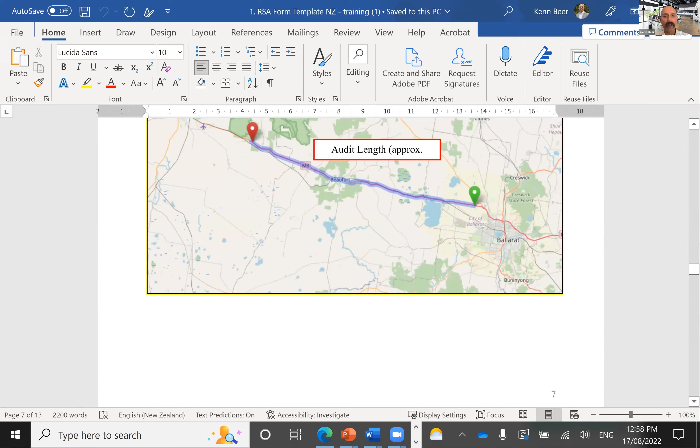You just put a little bit of information about what they're doing, okay? What this design is. Now, in a real one, you'd flesh this out a lot longer, but we just want a little capture of that. If you've got numbers on your drawings, put it in there, who designed it, what number it was. Some of them might not, because we had one of our designers just design something in your area for quite a few of them, but sometimes we use real ones when we could get our hands on them. So if you have those, put those in there. A bit of description about the project, where it is. It's probably longer than you need to in that example, and then you're into your findings.

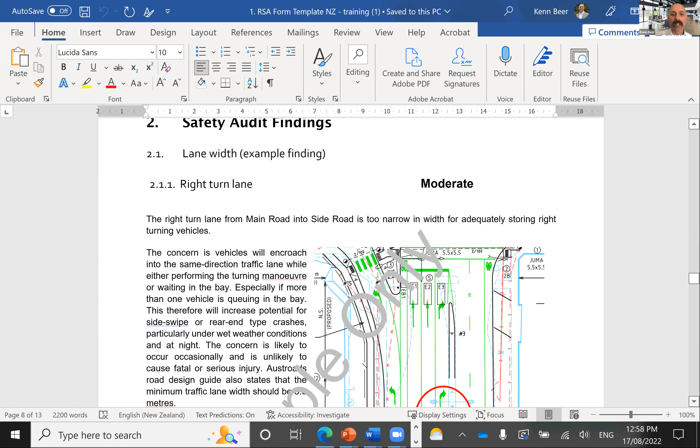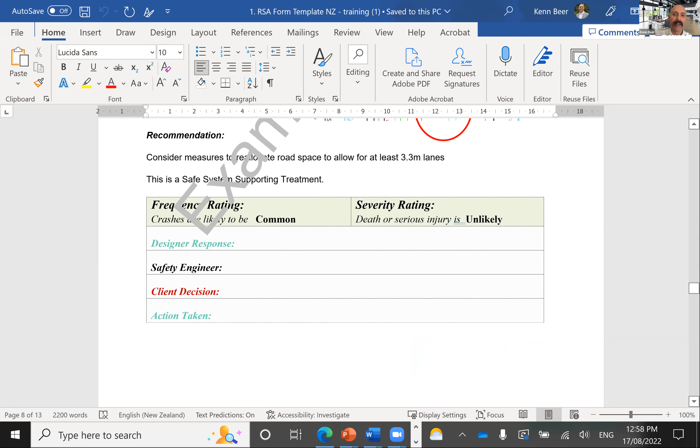Now you've practiced this already from the assignment you've hopefully just finished or you're about to finish, and you'll get some feedback on it. But we want you to continue this now with ones that you find, and you're going to look at the site and you're going to do exactly the same. And we only want you to do three. One, two, three. There they are. Then the final thing you do is you sign it, because this is a formal document, and we want you to practice that process of signing it off.

And the last thing we want is a photo of you on the site in a high-vis vest. That's the only photo we want. In a real audit, you'd put lots of photos of the different approaches and different issues and all of that. Just one. Prove to us that you went to the site, because it is an important part of auditing to go to the site, get a feel for it, and we want you to do that.

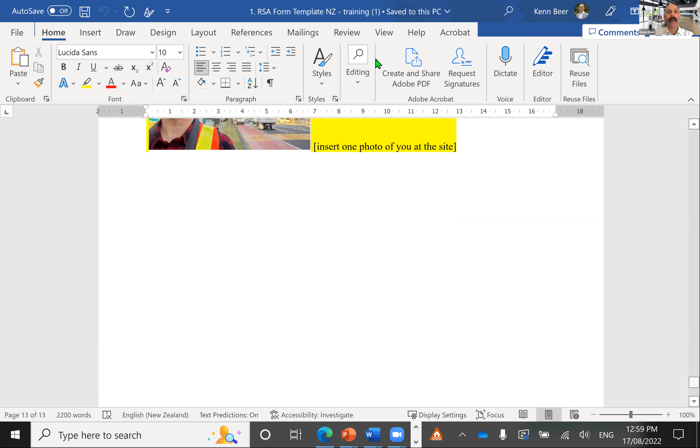Question would be, when is it due? Is a good question, and I'll just have a look at this. It'll be in there, and you'll have a good two weeks on this, I think, because we've got a session in a week's time where you can bring any questions if you want, and it is due the 31st. So you've got a bit of time to do it. You can get in contact with me. We can have a little meeting if you want, if you're struggling, or you can come to the next session, ask your questions, and we can go through those.